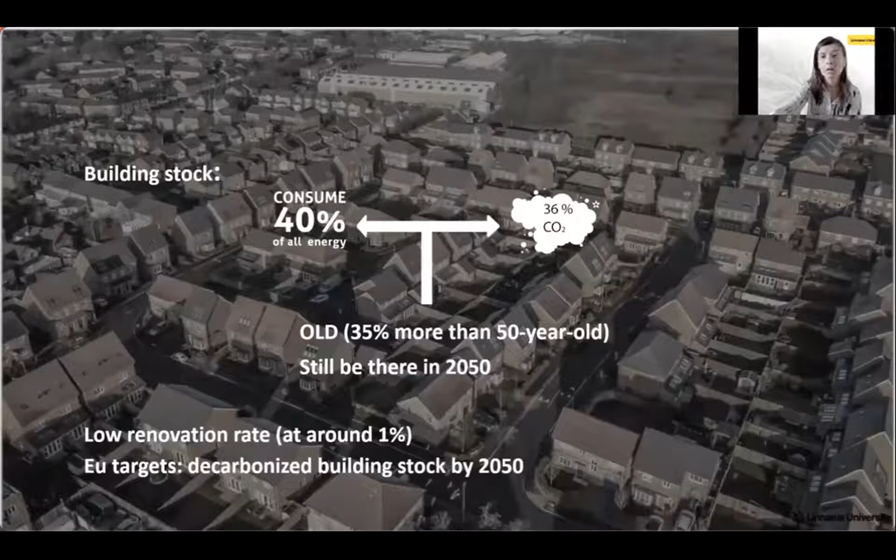We are in front of a climate emergency; there's a need to fulfill the Paris Agreement, and we need to act fast. The building sector is one of the main sectors to be addressed. Our current building stock accounts for more than 1/3 of the final energy consumption. In order to fulfill EU targets for a carbon-free society by 2050, we need to at least double the energy efficient renovation rate, which at the moment is around 1%. Member states are drafting long-term strategies and innovative action plans on how to tackle the decarbonization of their urban stocks.

There is a common agreement in the literature that the transition from a single building perspective toward a district level approach, tackling energy renovation, could be the way to go forward. This research tries to identify factors driving or hindering this transition. A systematic literature review is applied, and 85 papers are analytically assessed through a matrix that identifies motivation, barriers, and drivers for uptaking a larger scale renovation approach.

Environmental goals and climate mitigation still remain among the main motivations to transition from a single to a district scale approach. Anyhow, different papers bring up social and urban sustainability at larger scales. The district scale is considered the smallest scale where energy efficient measures could be integrated with shared mobility, integrated solutions, and smart city cross-sectoral partnerships.

Through the literature review, different drivers, considered as forces exerting pressure beneficial for upscaling deep energy renovations, are identified. Grants and subsidies still remain amongst the highest identified drivers to incentivize initial uptake of energy efficiency renovation at the district level. A shift of focus in recent years in EU-funded projects from single building intervention towards building stock renovation has been observed. Anyhow, different papers point out that grants and subsidies cannot be seen as sustainable in the long term.

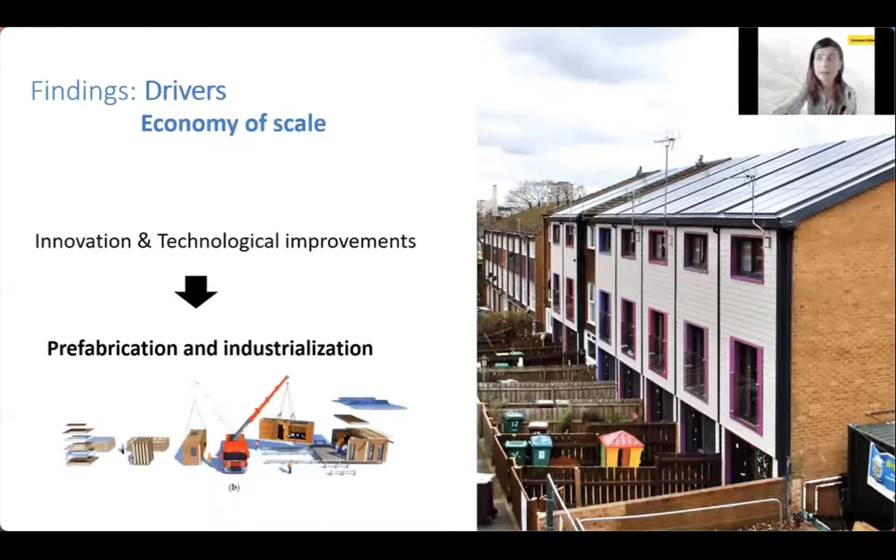Prefabrication and industrialization can cut investment costs of applying energy efficient measures as well as time of renovation construction works. And thus, we can have a less expensive and less intrusive process in general. Renovation construction is a fragmented business sector. Innovative business models are needed to exploit the added value of the whole retrofit.

When we are dealing with district scale approach, a large number of stakeholders is engaged in the process, making the process more difficult to manage and complex. Thus, one-stop shop and turnkey models where a single actor is leading the entire renovation process is considered as the way to go forward.

The new recast electricity directive has opened the door for creation of citizen energy communities, which have taken a leadership role in community energy production. These citizen energy communities can act as innovative business model and one-stop shop and use the energy production to capitalize the investment costs for district scale renovations.

Other innovative business models being investigated through different European projects is the add-on or infrastructure extension through densification of the existing building stock, aimed at the financing of the renovation cost for the entire stock. And this model still is in its initial phase of development, and further research is needed to validate its profitability.

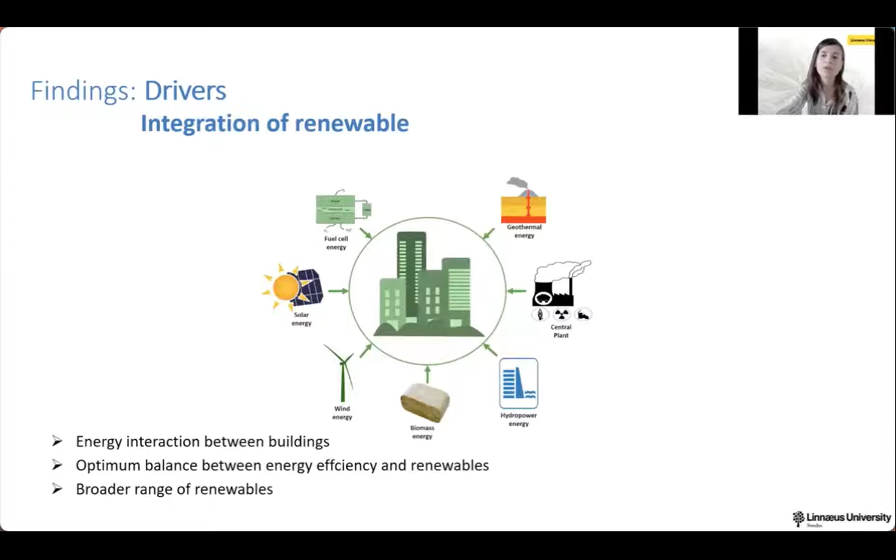Integration of renewables is the last but not the least identified driver within this paper. The district scale allows us to integrate the energy interaction between buildings, assess the optimum balance between energy efficiency and renewables, and consider a broader range of renewables to be proposed and integrated into the energy model.

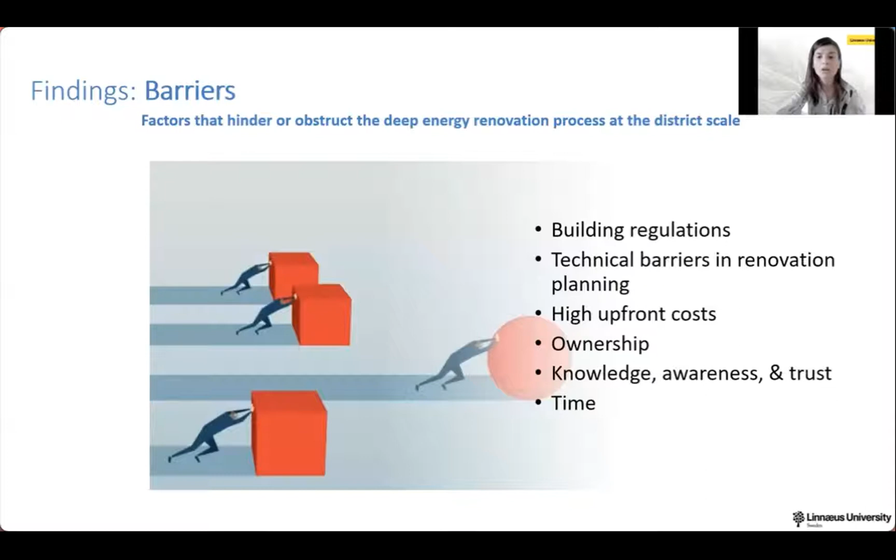Despite the benefits arising from transiting towards a larger scale approach, there are different factors that hinder and obstruct deep energy renovation process at the district scale. Among the main identified barriers remain building regulation, technical barriers in renovation planning, high upfront cost, ownership, knowledge and awareness and trust, and time.

Energy efficient measures proposed have to fulfill local development plans and building regulation that sometimes could be outdated and rigid to accommodate innovative measures and tools. This, in addition to permission procedures that are complex and time consuming, especially considering the large scale of intervention, can be one of the barriers for owners to uptake energy efficient renovation.

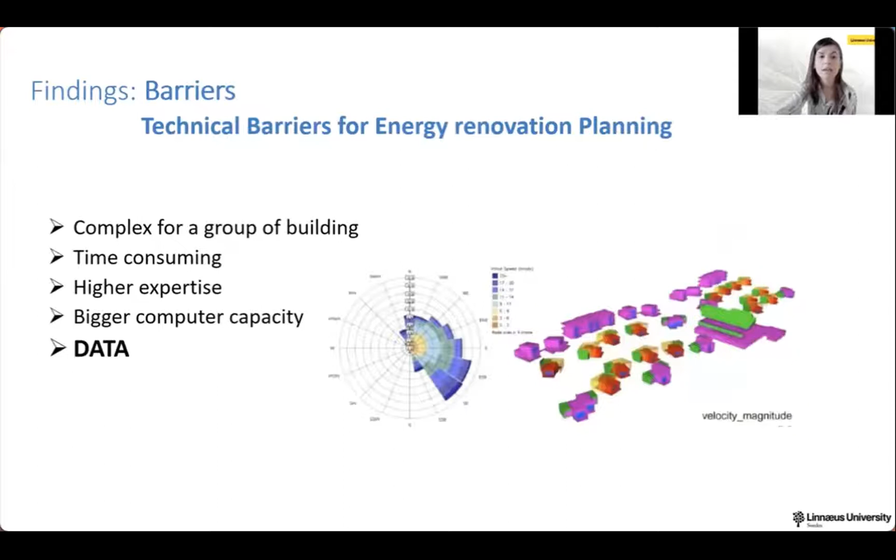Energy planning of building stock is of a different complexity level compared to a single building. It is more time consuming and requires a higher expertise and bigger computer capacity to assess, analyze the data and build energy models. Anyhow, the biggest barrier in this respect remains data. And when we talk about data, we talk about data availability and data quality. Although several databases have been developed in the recent years, we need more data and better data.

This clash and dispute between the need to publicly access the data and legal frameworks protecting data privacy needs to be addressed further in future literature as a way to make more data available for energy planning.

High upfront costs still remain as one of the main barriers to initiate energy renovation. In the district scale, not only are we dealing with higher initial investment costs, but as well higher expertise in allocating the cost efficiently is demanded.

When we are dealing with large-scale renovation, we are dealing with multi-owner engagement with different backgrounds and different needs to be addressed. In large building portfolios, there is a mixed ownership between public and private entities with different long-term interests and visions. This can be problematic, especially when we are trying to build a common renovation model for the entire building stock.

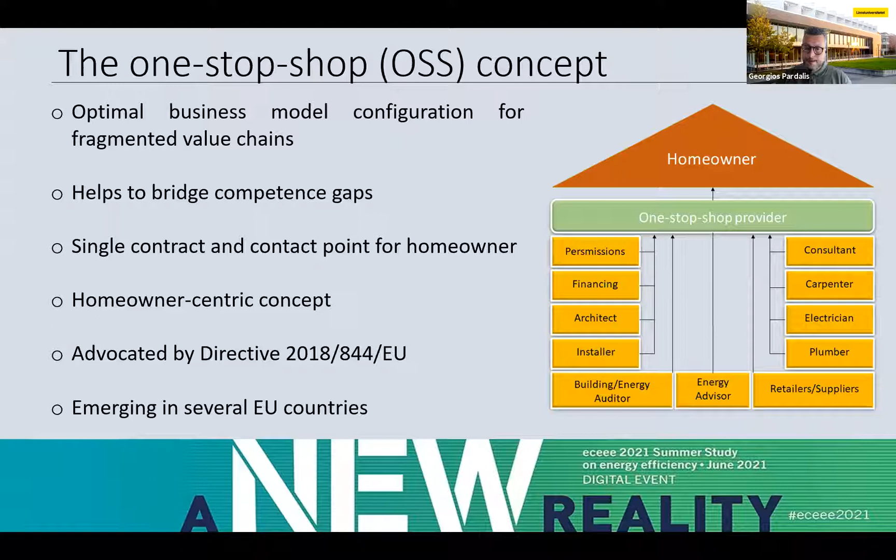It is also a model that comes in many different types. Previous research has identified 4 main types of this model, and in previous sessions today, I had the opportunity to share that many more typologies exist for one-stop shop business models. But mainly, the research has identified facilitation models, which are the simplest form of one-stop shop business models, and mostly focus on advising and motivating homeowners to perform energy renovations.

The coordination model, where a single actor coordinates several other actors in the supply chain and supports the homeowner with coordination of suppliers of materials and installers. Of course, in this model, the one-stop shop provider bears no responsibility for the quality of the work provided.

We have the all-inclusive model, which is practically the most integrated form of one-stop shop. In this model, we have a fully guided renovation process, a single contract, tailor-made renovation packages, and a one-stop shop that bears full responsibility for the quality of the work delivered, but not necessarily for the energy savings that will be delivered after renovation.

And of course, the ESCO model, which is quite emerging in multifamily residential buildings, but still its application in single-family houses is at a very exploratory moment, we can say.

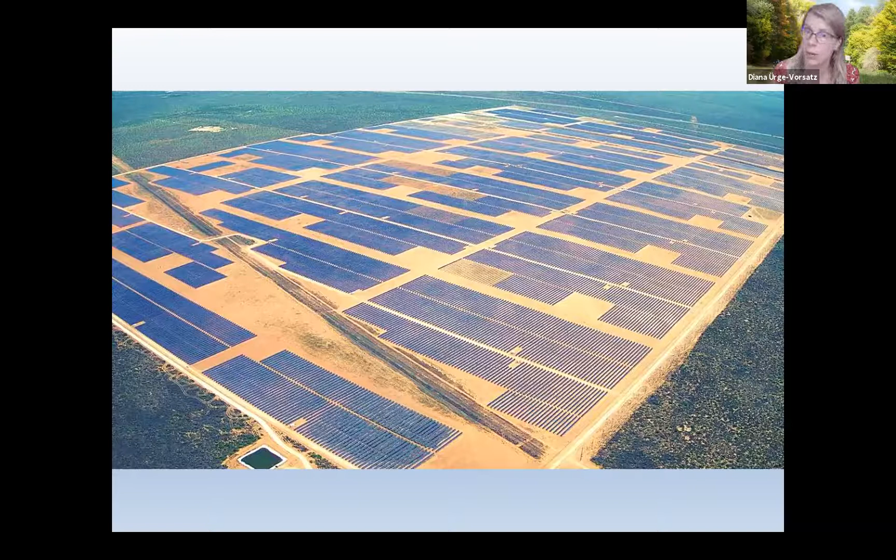So, as opposed to that, this is another solution. Why don't we actually see how much of our energy needs we could produce from photovoltaic power integrated into our present infrastructure, because the roofs of lots of the infrastructure we don't use, so it's much more natural to produce PV on these, even if it's smaller scale and perhaps has more barriers and somewhat higher cost. At the same time, you're not taking land away from other important needs. For example, in Europe, we certainly have a very high competition for land resources.

Also, aesthetics is not really an issue anymore. You don't perhaps even notice it, but this is also the same power plant as I showed earlier. These are tile-integrated photovoltaic panels. So by now we can really make them not visible, and they can comply with any monument protection perspectives.

So let's see, it's very difficult, but this bar is at the top and I don't see the title of my own slides, and I don't know how to make this top ribbon disappear.

But anyway, so the purpose of the research is to estimate the technical potential of solar energy production basically worldwide. We divide the world into different regions, but we are really trying to go into a very small scale, because the point is to have a spatially and temporally resolved, very high resolution model. The original model was produced by Ksenia Petrichenko in her dissertation a couple of years ago. She named the model BISE, the Building Integrated Solar Energy Model.

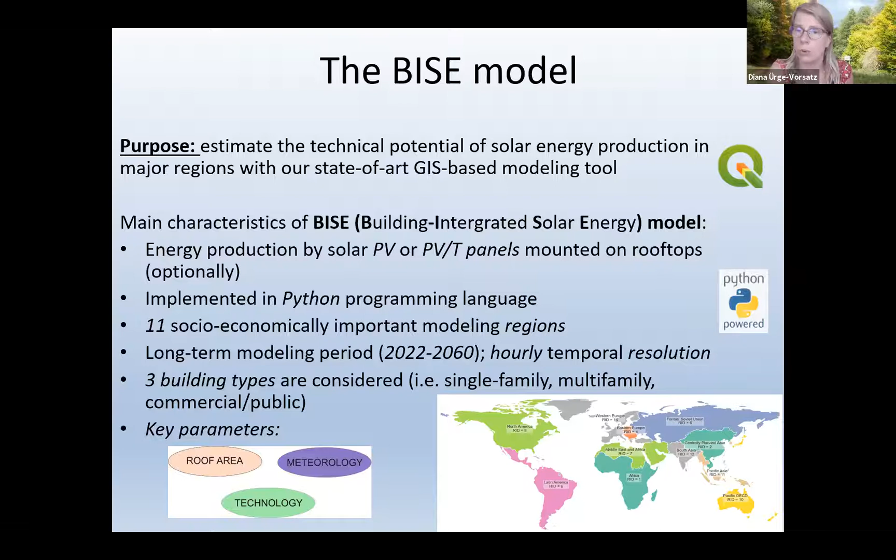So we have, as I said, very high resolution. Time-wise, we have an hourly temporal resolution, and we have, as I will show, a very high level of spatial resolution as well. So the key parameters right now that we are using as inputs are roof area, the meteorological conditions everywhere, and the technology.

So according to this, let me show you the three specific sets of methods and assumptions that we have been using. So first of all, in terms of the meteorology, we are using extremely detailed, high resolution insolation data and global radiation data from NASA, through different methods.

And again, I forgot to say that the model is further developed by Gergely Molnár, and unfortunately we couldn't register so many of our team at eceee, so I'm presenting, but he's the main brains on the updated model. Apologies.

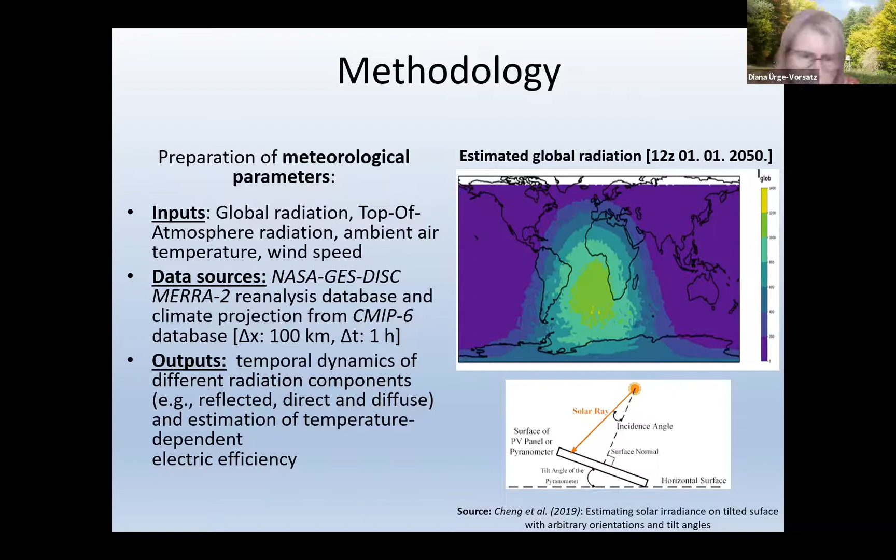So with regard to the next step, the roof area, we are using the Global Human Settlement Layer database, which is a 10-meter resolution, so it's a very high resolution map. And in fact, we are making it even more correct with a 1-meter resolution database. So it's a GIS-based supervised classification. And we are modeling not only the roof areas on a very high resolution model, but also roof tilting, since for PV panels, the roof tilting is also extremely important.

And we are trying to model what portion of the roofs are pitched or flat, and what angles they are at, which is really not easy, but that's needed to understand the total PV solar energy potential. So in terms of roof area availability, we are working with the so-called utilization factor: how much of the roof areas can be used best for solar technology. And this has different components: azimuth, surface area, roof tilting, shading, and other obstacles.

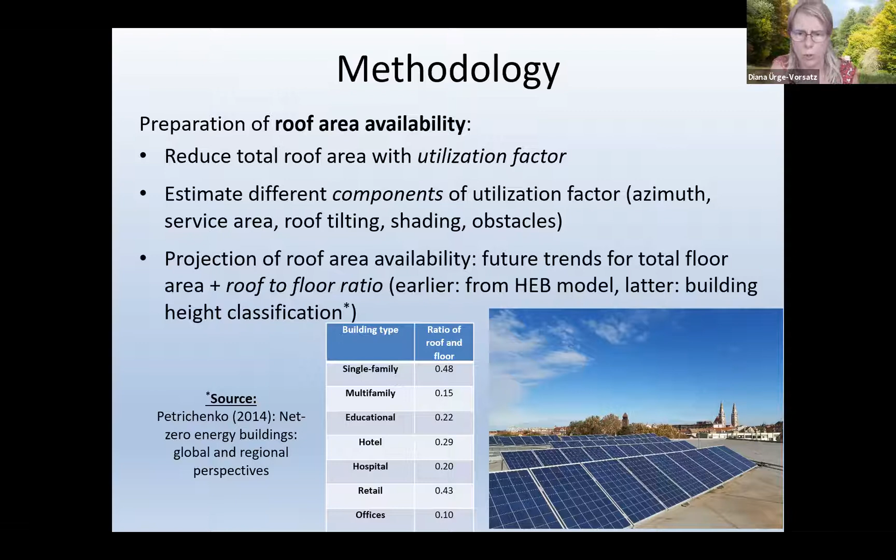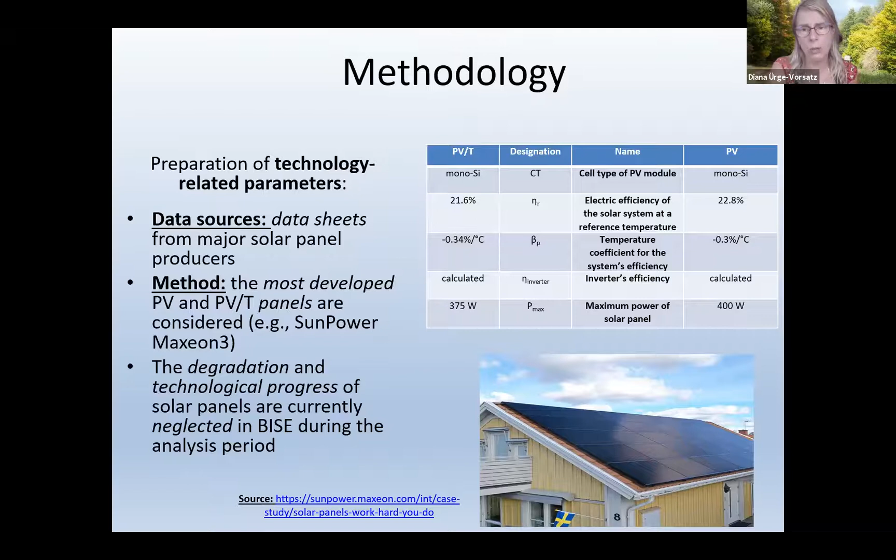And based on this, these are our utilization factors, still mostly based on Ksenia Petrichenko's dissertation, but we're updating these as well based on new information. And finally, as I mentioned, the technology has developed much further since 2014. So we have looked at a wide range of new PV technologies and their applicability in different geographic and meteorological zones, and are using the updated technological parameters.

So we have different findings. One important intermediate finding is the roof areas, or top roof areas of buildings, available in the whole world. And we are actually forecasting that based on our other model, the high efficiency buildings model, which we have been using for over 10 years to look at global building energy demand. And there was a very successful presentation by my postdoc Souran Chatterjee yesterday on the results of that model. So we are using that model to help us forecast the increase in building floor area, and as a result, the roof area in these different regions.

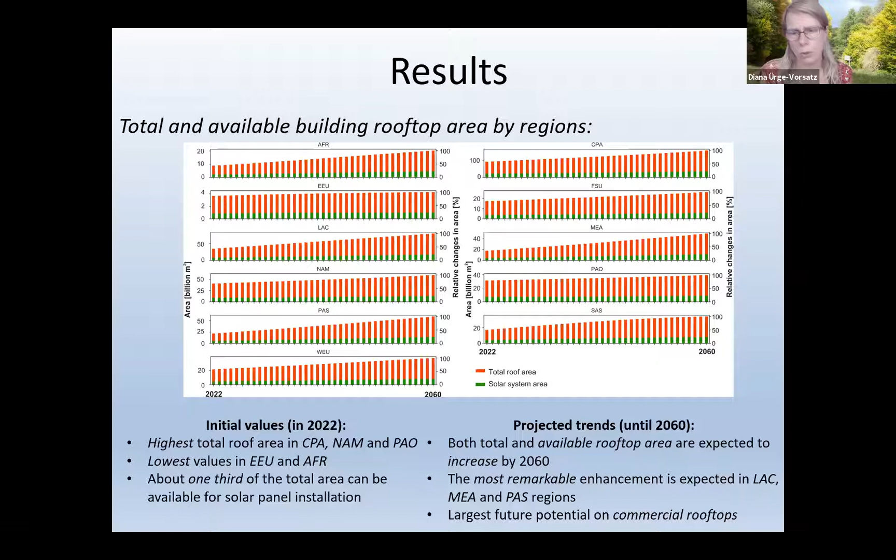So what you see here are the IEA regions. We are working compatibly with IEA data because we are also consistent with the different IPCC scenarios. So when you translate the roof areas into solar electric energy supply, the key finding is that even in 2022, just the technical potential of solar energy production is definitely sufficient for total global consumption.

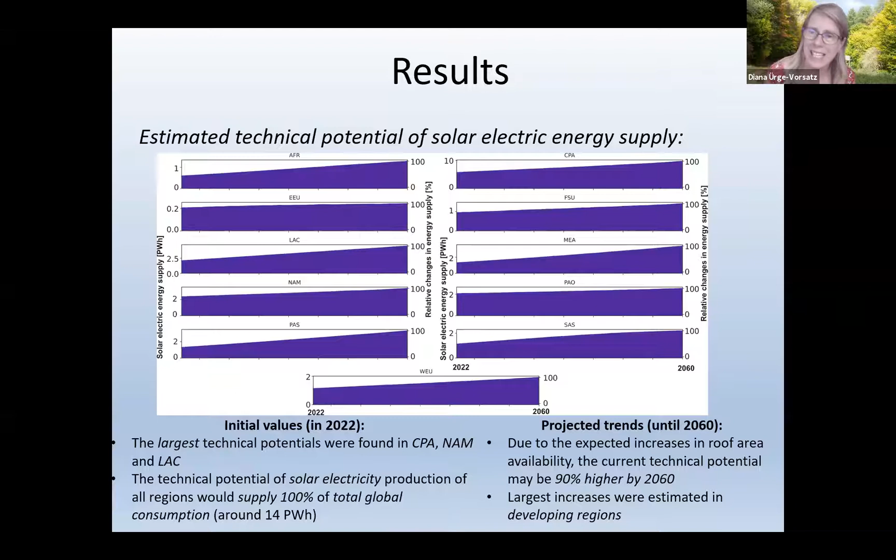So that means that you don't necessarily need to use valuable land. Of course, not everywhere is land very valuable, and there are marginal lands, but in areas where land has other important uses or demands on it, you could actually solve it mostly on a global scale and also on many regional scales. You could supply local energy demand just by building-integrated photovoltaic energy production. Of course, it doesn't yet mean that that's possible at every building level.

If we look at the solar thermal energy supply, we see whether that is enough to supply thermal energy needs. That's of course not the same. Very different in the tropical regions and in the cold climates, and very different seasonally as well.

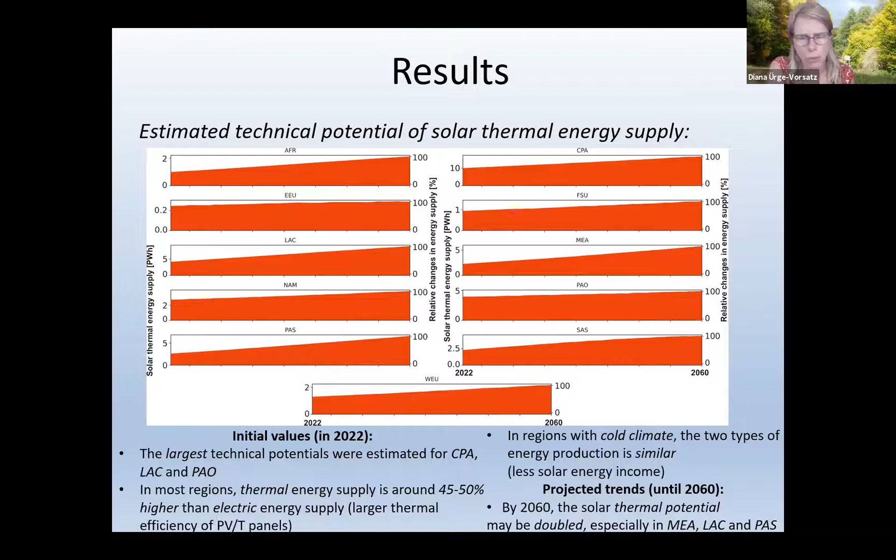And we are just working on matching the temporal distribution of our energy supply with the energy demand, solar and the electric and thermal energy demand. And of course, whether you can match it fully really depends on the level of efficiency, and that was already a very important conclusion from Ksenia Petrichenko's dissertation a couple of years ago.

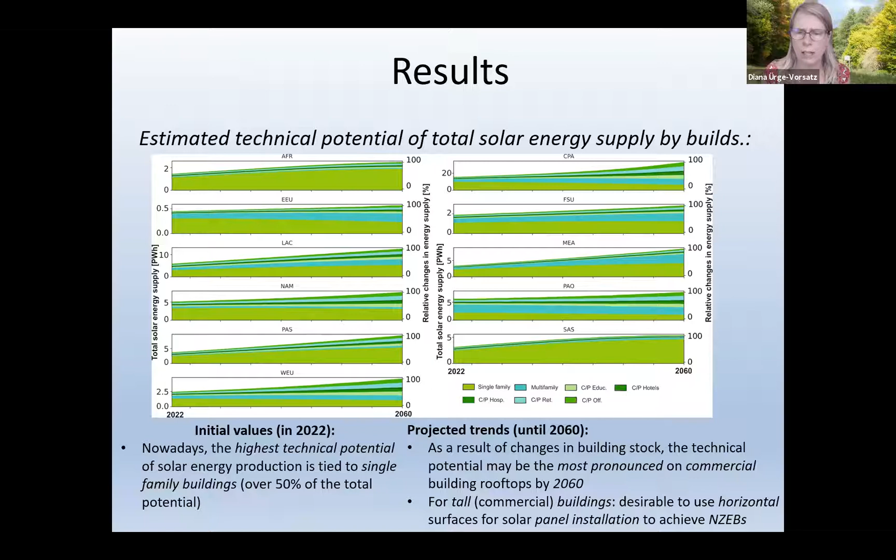But it's also important to understand that in high-rise buildings, very often it will not be sufficient to produce energy just from the roofs. So very likely in these buildings the vertical surfaces will also be needed to supply the energy demand.

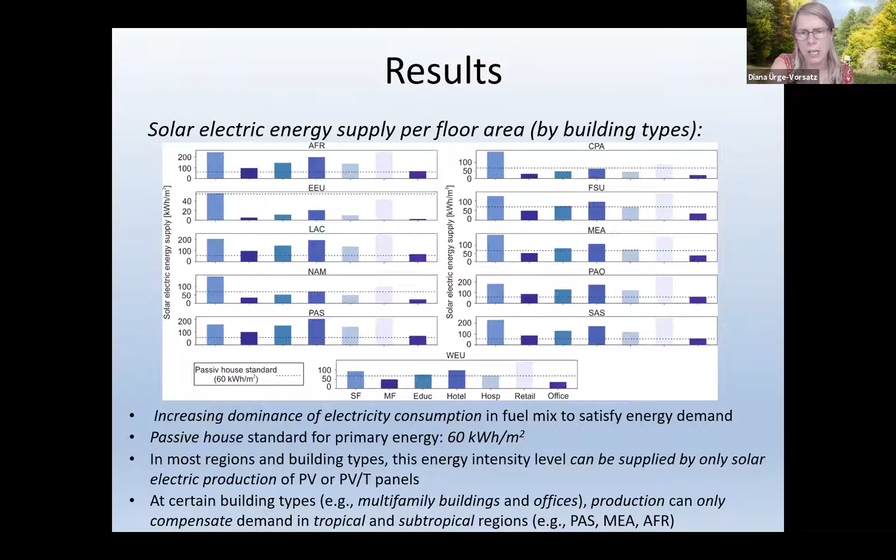And this is with the assumption that we worked with the primary energy requirements of passive house levels, since we know that passive house standards can be met basically in any world region and any climate. So that's what we took as a standard in terms of whether it's possible to satisfy energy demand by building integrated solar energy.

So in terms of summary, although our results are not fully final yet, our initial results and also earlier Ksenia Petrichenko's dissertation have shown that it is possible to supply global building energy demand, not only heating and cooling, but total building energy demand, by building integrated solar energy. The highest growth potential is definitely in the developing regions.

And the most significant local production from PVT panels can be in single family and commercial buildings. But in tall buildings, we will probably have to use also the vertical surfaces if we aim to meet net zero levels in most building types.

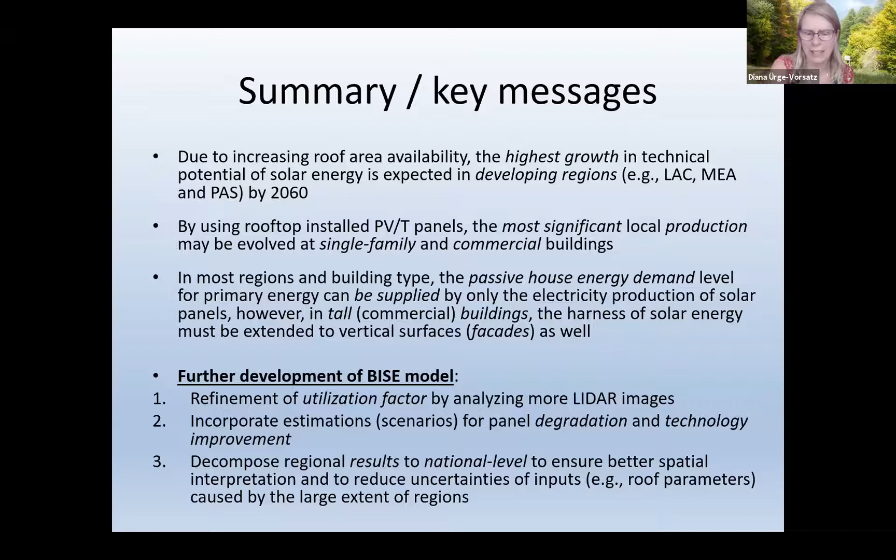We certainly have a lot of plans on how to develop our model further, and hopefully we will get several ideas also based on your questions and comments, and later on you're also welcome to send us emails.